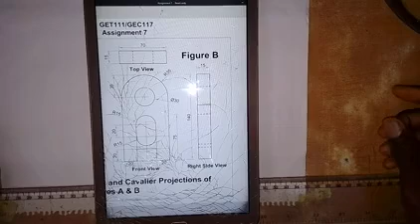Welcome to my channel. Here we're going to be working on this problem. We are going to make use of a compass to produce the circle and the curve on the cavalier oblique projection of this object.

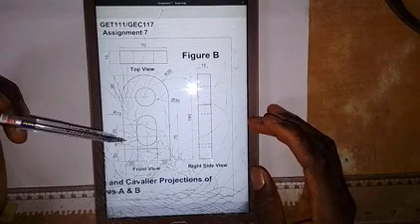As you can see on the screen, the total height here is 140, the thickness is 15, and from here to this point is 75. Diameter of this circle is 30, radius of this curve is 35, and for this curve radius is 15, and this also 15. From here to here is 20, and for this is 15. Distance from here to here is 70, from here to here is 20, from here to here is 20, that means from here to here is 30.

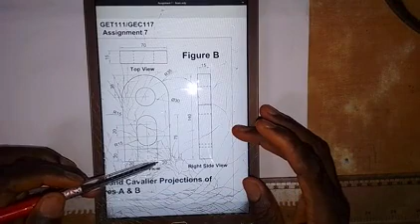So we are going to make use of the compass to produce the curve particularly. That is the main purpose of making this video. We have worked on isometric, and also I used another method to produce the oblique curve and circle. So let's make use of compass to work it out.

Now, the first thing we are going to do is draw a short horizontal line at this point. So we have it here. Then with a 45 degrees set square, we are going to draw a vertical line in this direction. We are still going to draw a vertical line at this point here.

Then I'm going to take a measurement of 70 millimeters. So this is 70. Then this 70, I'm going to break it down into 20, from here to here is 20, and then 20 here. I'll do that at once.

Then I'm going to take a measurement of 140 millimeters here on this line. So from this point, we take 140 millimeters up. This is 140 millimeters, we have it here. Then I will come to this point where that 70 millimeters stops, and I'm going to draw a vertical line at this point like this.

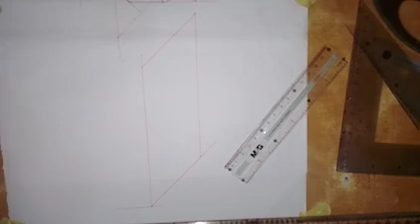Okay, so we have that. So let's start like this. Let's produce the curve that we have here with the hole. So for the curve, it has a radius of 35.

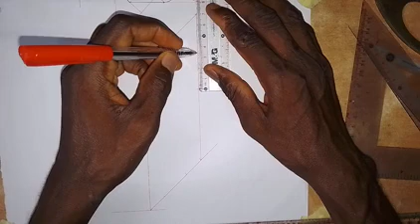So I'm going to take a measurement of 70 millimeters down. This is 70 millimeters. Then I will break that 70 into two, so 35 and 35. I'll do the same thing here, take 70 millimeters down, then break it down into 35, 35. So we have this.

So here I will connect this together, like this. Then I'll connect this together like this. Then I'm going to break this 70 down into two, so that is 35 millimeters. So this is 35. And then I'll do the same thing up here.

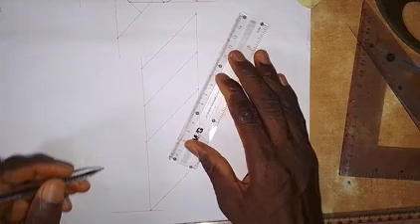I'm taking the measurement one by one to avoid an error. So we also have 35 here. So I will connect this together, connecting these two points together like this. So we have it here.

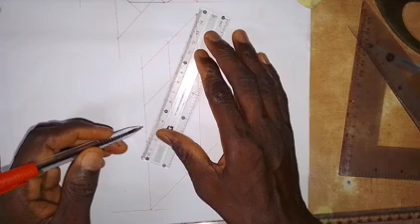Then this corner and this corner, I will join them together. I will join these two corners together like this. So connect these two corners together like this. Alright, so we have it here.

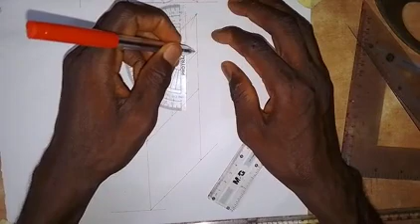Then the next thing I'm going to do is draw the curve here, so I will take my protractor and set it at this point here like this. Then I will set it like this, making sure this line on the protractor is on the line. So I will set it like this.

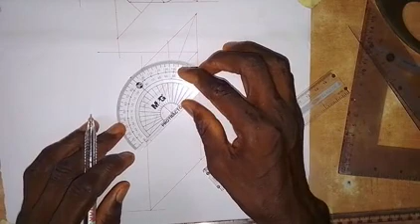Then this line that goes to 90, I will make a mark, and then I'm going to draw a line from this point, going in this direction. Then we do the same thing coming down here. So I'll set the point on the line, then make a mark here on 90. Then I will draw a line from the point, passing through this point, so it goes like this. Alright, so we have this point here.

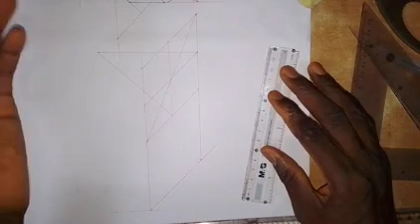Okay, so we do this if you are to make the circle, but I'm making use of this point to draw the curve here. So I'm making use of this point.

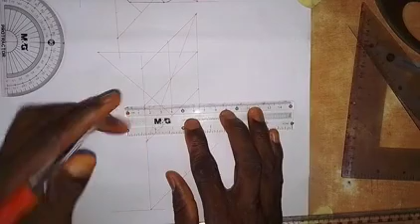So the one I'm going to use to complete it will be drawn here. To do that, we also set the protractor like this on the line, and also at the point, so we set like this, and then make a mark here on the paper. Okay, so I will draw a line from this point, through the point that we put on the paper, like this. Then I will also set the protractor like this, also at the point.

You have to draw the circle. That's when you need to do this to this one, okay, and also this one. So then put a mark here on the paper on that 90. Okay, so then we draw a line from here. So draw a line from here. So this point is supposed to... So draw a line from here to here. So we have the point here.

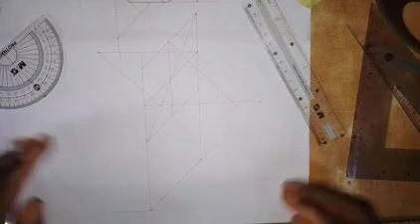Okay, so we are making use of this point, this point here. Those are the points that we are using. I'm not going to make use of this, and I'm not going to make use of this. But if I'm to draw a circle, I'll be using this point to draw a curve here, this point here to draw an arc to here, this point to draw an arc from here to here, and this point here to draw an arc here, so that it forms a circle. But I'm just drawing a curve.

So what I'm to do now is to put the point of my compass here at this point, extend to this point here. Okay, so I will check. Bringing it here, I will draw like this. That will give me the arc there. To give me an arc there, I adjust it very well. Then we draw an arc like this. Alright, so we draw this arc like this.

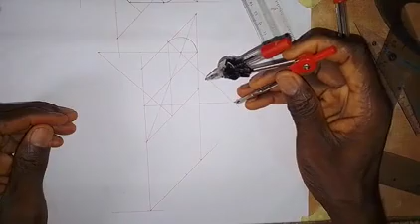So then we now come to this point here. Put the point of the compass here and extend it to this point here. Okay, so if we draw to touch this point, I can go from here now. Take it easy, my compass is not really okay. So we go like this. Alright, so we have this now.

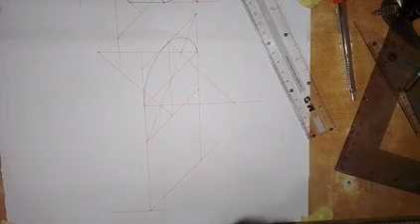So that's it. Then we are going to create a hole here, so let's quickly do that. The diameter of the hole is 30, so the radius is 15. 15 millimeters from the center, 15 millimeters from the center, and also on this line, you take 15 millimeters down and 15 millimeters up, making 30.

Then with the 45 degrees set square, we are going to come to this point, draw this line from here to here, and then I'll come to this point, draw a line from here to here, and then here, you draw a vertical line through this point, and then draw a vertical line through this point here like this. Alright, so this line is still serving as the line that connects this corner and this corner together. So now we are making use of this point here, this point, this point, this point. Those are the points that we are using.

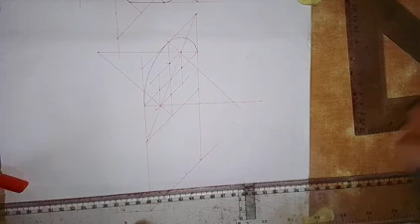So in this case, to use a compass may be somehow uneasy. So use this particular French curve, just set like this. Use this particular one and make sure the points on this part of the French curve, adjust it very well, and then you can draw the curve like this. So draw this arc like this. We want to form a circle, so you are going to see that we are going to form the circle. So set it again on this point like this.

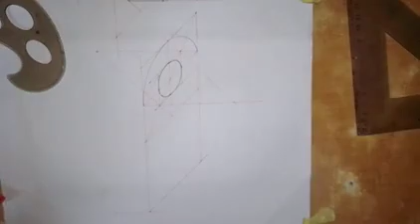Okay, so set like this, and then we draw the curve like this, or the arc like this, and then set the French curve over these 2 points here, so you can draw like this. Okay, the reason why we are using the French curve is that this circle is not very big, so I've drawn an oblique circle with this method that I used to draw this curve. But the square that we have is bigger than this one. Alright, so you can see that we have produced it.

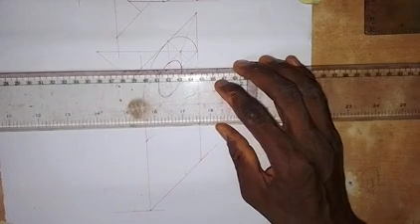Okay, so the next thing, let's get the thickness of this thing. The thickness is 15 millimeters. So I'll come down here, take a measurement of 15 millimeters on this horizontal line. So this is 15 millimeters here. Okay, so then I'll come here. I need to draw a horizontal line from this point. So draw a horizontal line from this point, and then we come here. So we draw a horizontal line from this point.

Then I will take a measurement of 15 millimeters here. This is 15 millimeters, and then I'll come here and take a measurement of 15 millimeters. This is 15 millimeters here. So I will join this together.

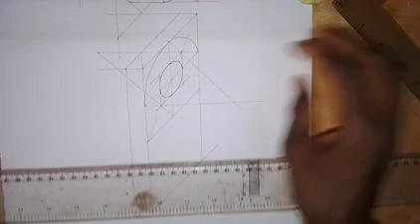I'll join this together like this, and then I'm going to draw a vertical line here. So draw a vertical line here like this. Alright, so we have this now. So now we draw a horizontal line. So draw a horizontal line from here. So let's complete this one.

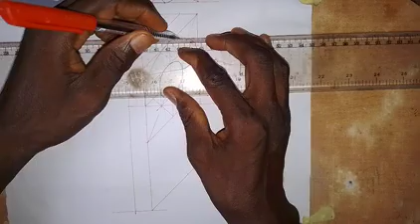So we are going to have a point. Just take a point somewhere around here. So draw a horizontal line. So come to this point here. So we already have a line on this one. Come to this point. So you draw a horizontal line, and then this point somewhere around here. So you draw a horizontal line, and then we take a measurement; from here to here is 15 already.

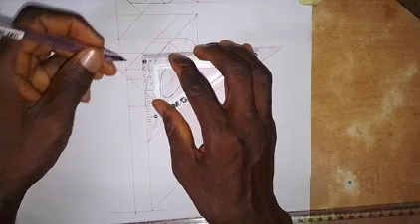From here to here is 15. So I'll come here and take a measurement of 15 millimeters. So this is 15 millimeters here. So we come to this particular point here. Okay, so take 15 millimeters to this side, and this is already 15. From here to here is already 15 millimeters. So I'll just come here now and take 15 millimeters. So this is 15 millimeters.

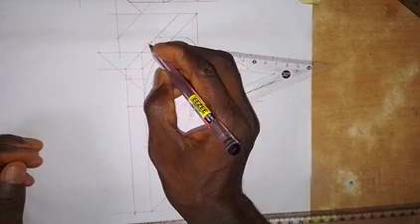So we have this point, this point, this point, and then this point and this point to join together with the use of a French curve. So it goes like this. So set the French curve like this. Okay. So set it like this, and then draw the curve, and then we join these two together like this.

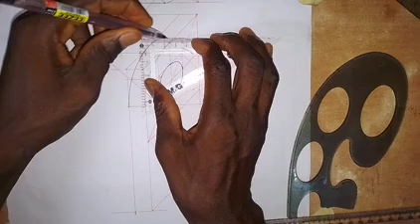Alright, so then we make this line a thick line. So make this line a thick line like this. Alright, so then this line, I'll make it a thick line at once like this, and this line also will make it a thick line. Alright, and then we are going to see part of this hole on this face here.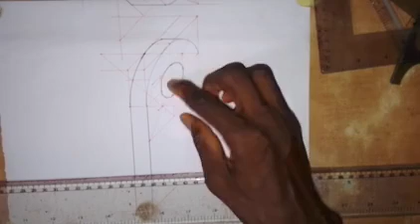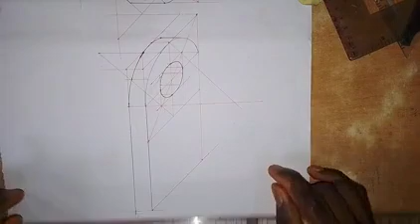So what we have to do is to draw a line. So draw a horizontal line from this point, take a point around here, draw a horizontal line, then come up here, draw a horizontal line, and then come up here, draw a horizontal line like this here. Alright, so now I will take a measurement of 15 on this line from this point here. So take 15 millimeters, so this is 15 millimeters, and then come here, so you take 15 millimeters.

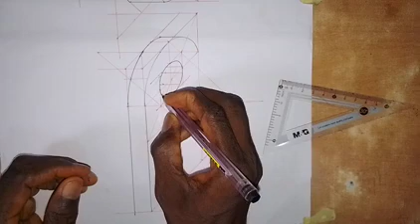Okay, so these 2 points that we have here will be connected to this point, and then connect it to this point. So we make use of the French curve to connect them. So just set the French curve, set it like this. Okay, so I'll just set the French curve like this, and then I will draw the curve. Alright, so that's it. So you can see the part of the hole on this face here.

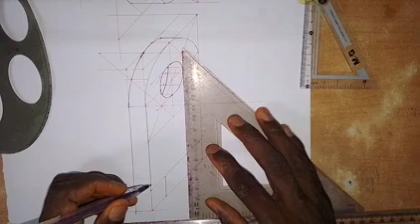Then the other thing that we have here is a cut here. So this is 20. So with the 45 degrees square, draw like this, and then from this point where we have 20, draw a vertical line here like this, and then you come here to draw a vertical line like this.

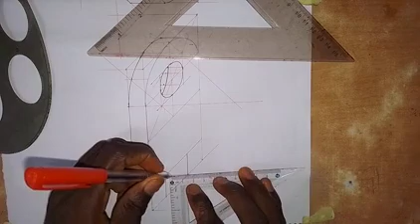And then now we come to this point, we are going to draw a horizontal line from this point inward. So draw a horizontal line from this point inward like this, and then take a measurement of 15. So from this point here, 15 millimeters, this is 15 millimeters. So all I'm going to do now is to draw a vertical line from this point. You touch this line. So make it a thick line at once. We have it like this.

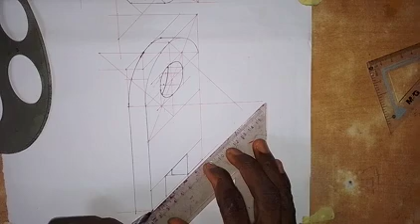And then I'm going to make this line a thick line from here to here. And then this line also from here to here, I'll make it a thick line. So we are done with this part. So this line will be a thick line. And this line also will be a thick line from here to here. And then to make this one a thick line. So we still have one more part to produce, which should be on this surface.

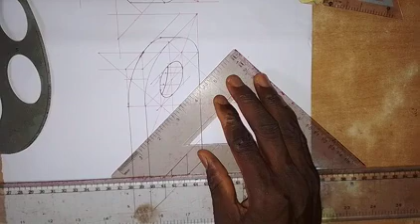And then from this point here, I will take a measurement of 15 millimeters. Take 15 millimeters down. This is 15 millimeters.

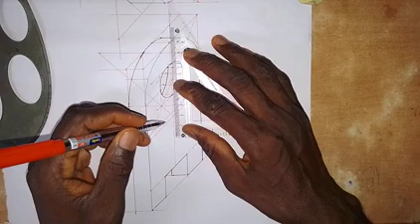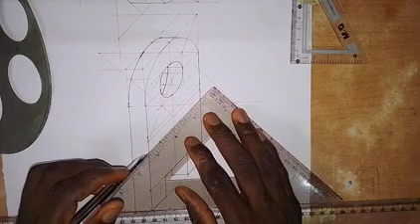And again, take another 15 millimeters down. So this is 15 millimeters, making 30. So now, I'm going to draw a line through this point like this. Then through this point also I will draw a line like this. Okay, so I'm looking at this line.

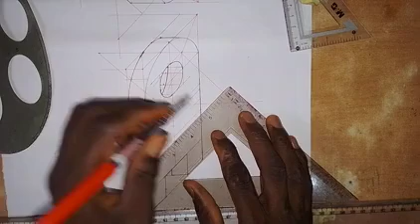Oh, sorry. So this is where I have the first 15. Then I need to take another 15 millimeters down. This is where I have it. Okay, so we draw this line. You just need to be careful, because the lines are many. So we draw this line, and again we are going to take a measurement of 15 millimeters from here to here, and from here to here.

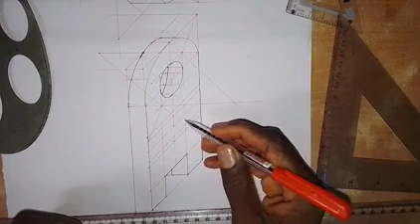So we draw a vertical line. Here we draw a vertical line down, and then here we draw a vertical line down. Alright, so we have a curve around here. This is the midpoint. Okay, so for the curve that we are producing, we are going to join these corners together.

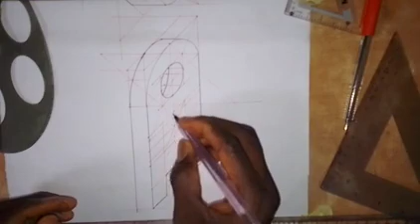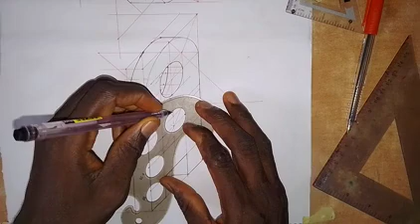So here I'm making use of my French curve. We have a point here, then we have a point here, then we have a point here. These 3 points I will use to get the curve drawn. So I will set my French curve like this, the way we did for the upper one, and draw the arc from here to here.

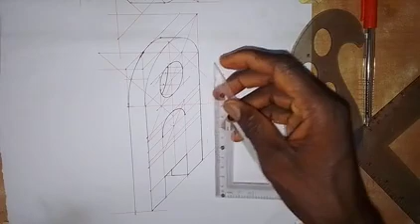So we have this now. Then I will set it here like this, and join this point together. So we have produced this curve now. There's another one that we have down here. So from this point, if you look at the diagram, to get the center of the second one down here, we have to take a measurement of 20 millimeters down. So that's 20 millimeters from the center of this one.

Then I will now take 15 millimeters down. So this is 15 millimeters. At the same time, from this center here, I will take 15 millimeters, making it 30, because I want to produce an oblique square on that face. So I'm going to draw a line from here to here, then coming to this point, I'll also draw a line. So I've formed an oblique square. These longest corners, I need to join them together. Just take note of the lines. So we join these longest corners together like this.

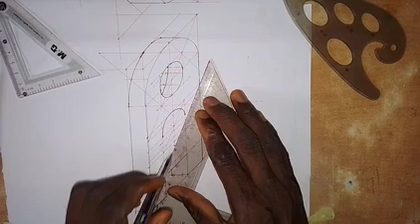Okay, the midpoint. I need to draw a line through the midpoint. So this is the midpoint. I draw a line from here to here. So now we are making use of this point. Sorry, this point, it is down. So this point here, and we are using this point, and this point. Those are the 3 points that we are using.

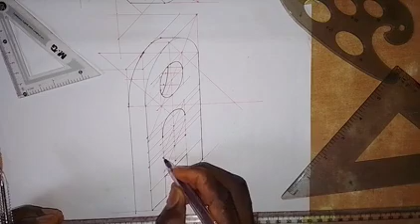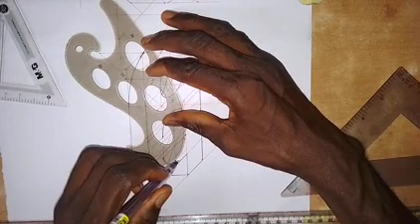So I just set my French curve at this point here. Set this very, very well. Then you draw the curve like this. Then I will set this one like this, and produce the curve. This is it. Alright, then this line will be a straight line. So join this together with a straight line, and then join this together with a straight line.

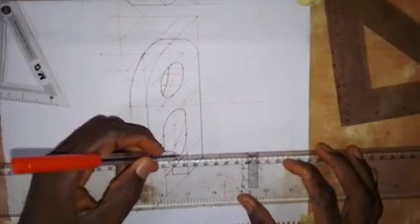Then you also need to see another part of this. Around here, we come to this point here and draw a horizontal line. Then you come to this point, draw a horizontal line here. And at this point, I will also draw a horizontal line. Then I will take a measurement of 15. I'm not going to take a measurement here, but I will take 15 millimeters here on this line. So this is 15. Then on this line, I will also take 15.

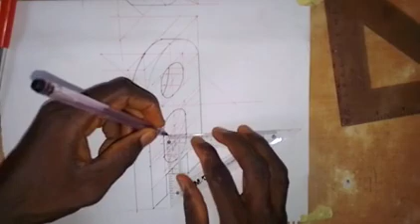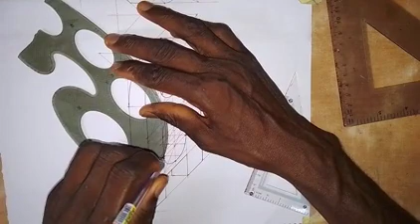So now, with my French curve, I will join this point here and this point together. Just set the French curve like this. Then we join this together like this. Alright, so we have that. Then at this point, you have to draw a vertical line, from here up. So this is how it will look.

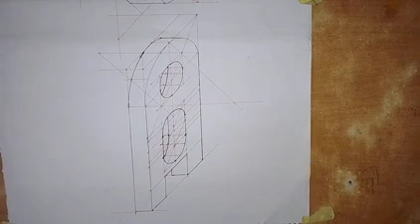And then this line should be made a thick line. So we have this. This is all that we are asked to do. It's as simple as I've done it here.